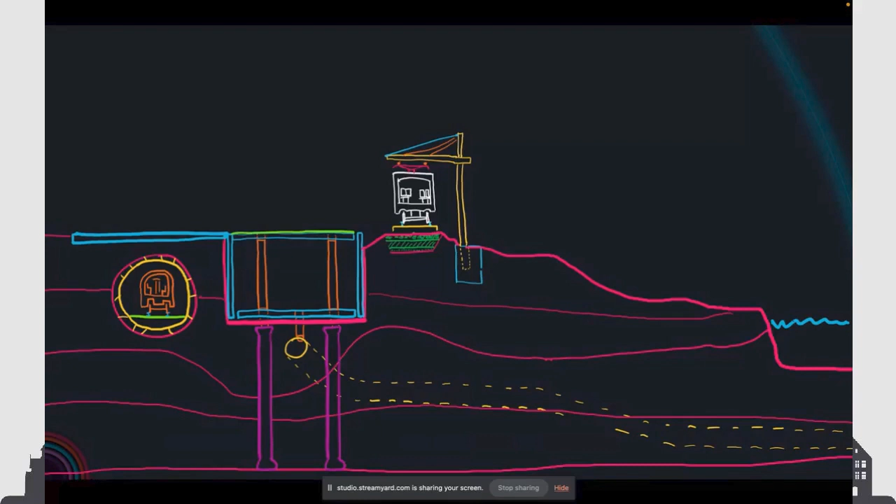And so that's the second thing. And this is where you get this, and some people like to call these digital threads or something like that. How can we relate all this data together without having to convert to a huge master format? So I'll just play through these slides quickly. But what you end up with is, okay, we have IFC today. We could break it into individual pieces, but those individual pieces aren't enough because we need different representations that buildingSMART doesn't necessarily provide.

I'll skip through these. Sorry, tend to do animations. When looking at them, they're not nearly as complex.

So the approach you could think about is to say, okay, IFC is going to be the solution to all these things. Good, Jeff? Okay. IFC is going to be the solution to all these things. But at the end of the day, ownership of this entire concept of a distributed built environment has to be much more diverse, and it can't be one standard to rule them all. So we end up with a need to make a bridge between what we have in IFC today and what we have in these other formats.

And I'm just listing some that have come up. There's hundreds more that aren't described in the Rail world. There's others that aren't represented here. The point is we should plan for anything to be related to a future version of IFC and make that simple, not something IFC and buildingSMART has to necessarily design for. So questions so far? This is just background information, I suppose.

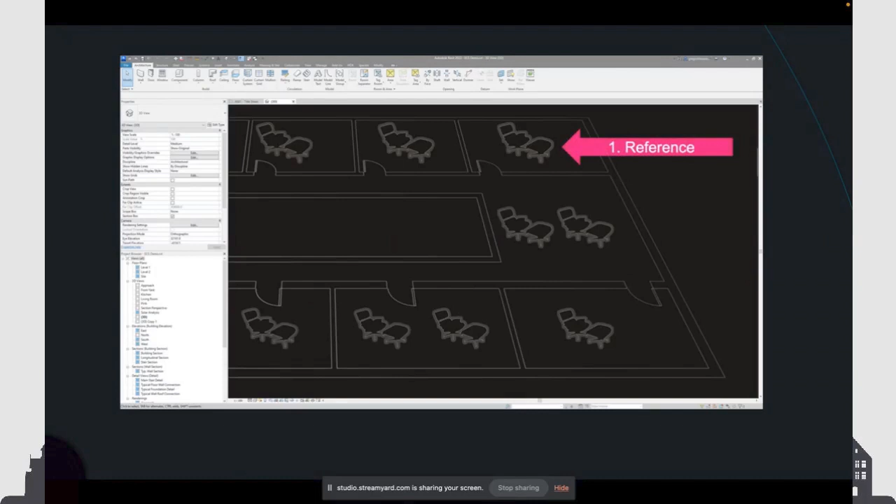And I skipped over this, but it's an important thing that we've been talking about in our community for a long time, is a notion of how this can enable design transfer. And so the key thing here is by breaking these data pieces into chunks and pushing towards a reference workflow, we actually fully support not transforming data, but just having the data that existed prior to being moved into an application actually existing after it moved out of an application. So you can do something which is like design transfer, but you don't have to have perfect interoperability on geometry.

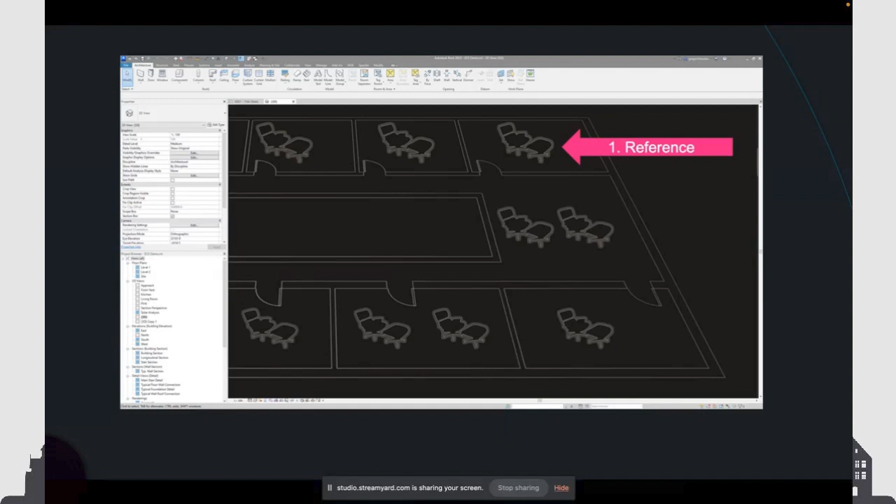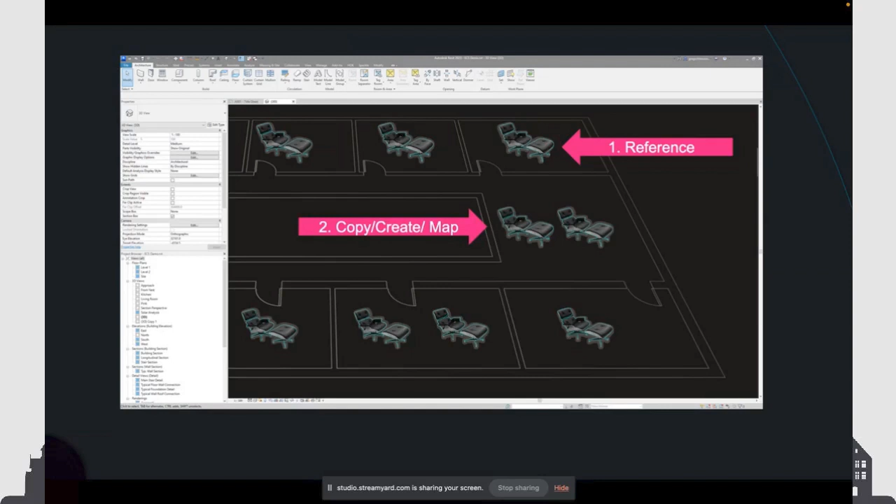So the point is, if we take application one, publish some components, reference those components into the second application, I can copy, create, or map, as in make some new data inside of the existing application. Leif Granholm has always pointed out that Tekla, when it references an IFC, actually brings in an IFC, and then the second you want to make a change, it duplicates it, and now you're editing a detached or referenced copy, but it is a copy. You're not editing the native data.

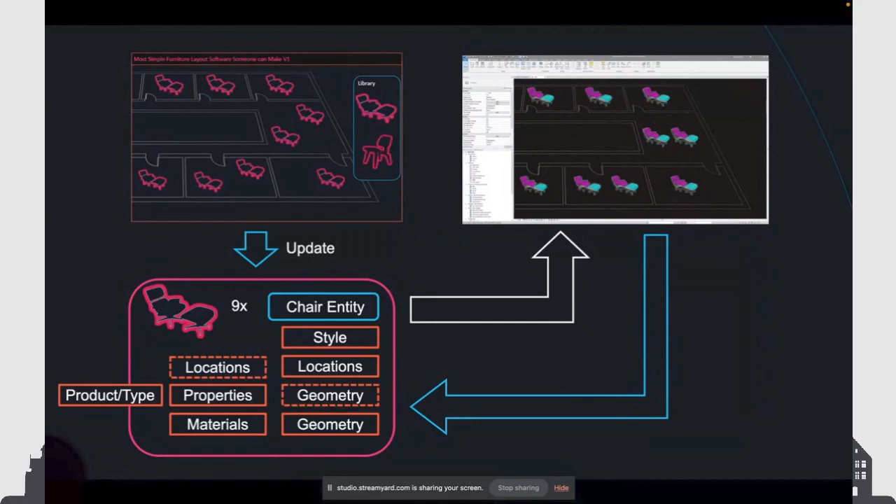So by embracing this fact, you can add the new information, and because the combination of these things can happen external to the application, you get to choose which one of those you would collect up and move forward. So I'm not destroying data if I move it through an application, because I still have it. I'm just adding to it and versioning that data as you add more applications to the chain. So this plays forward logically to say, if I have a contractual relationship, there's a procurement step, I can share a couple of pieces of information. The company on the other side of this relationship can add new data.

And the point is, the white boxes came from the left side, but the right side can add new data. And then if this were to be updated or iterated on, sorry, I forgot I took that slide out, like if locations changed on the left, they could be updated on the right via a new version. And basically any of the data that was added out of sequence, so you can think about this as sort of breaking linear data requirements. They can be updated after the fact. And this could be version 2 on locations that came from the design team, but the data that was added on the right side is just fine.

Again, now this is an excellent example why I asked about GUIDs. So let's say I'm an architect designing in Revit, and it creates a GUID. Okay, and until this element is destroyed, it will remain. But let's say I somehow, by mistake, deleted those elements and added the same chair again. The guy on the right-hand side lost the connection. So the cost, procurement, and so on, connection to that chair is completely lost.

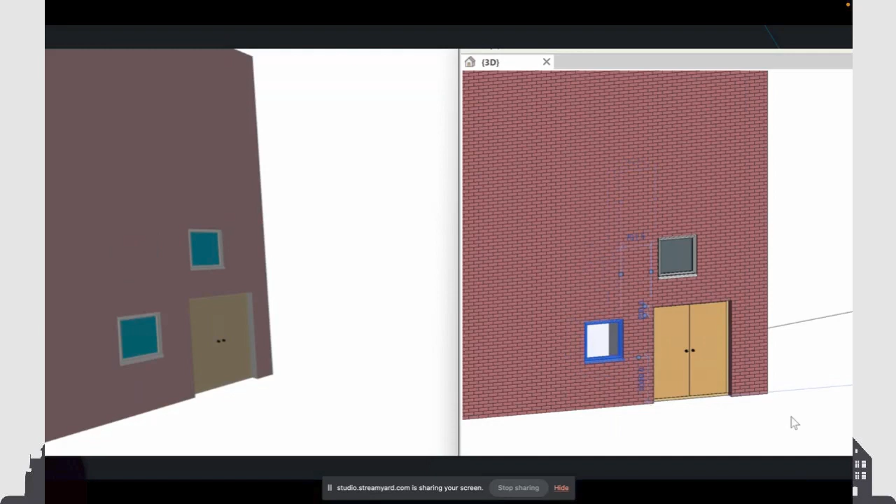From a game development perspective, this looks a lot like asset pipeline production. I'm showing you an example because examples, we're making these changes to facilitate them. This is just a dumb, simple one. Yeah, this does make tooling much simpler to imagine. The next actual slide I had is Tom Van Dieg, the CTO of BIMcollab, doing an example of what you're just describing. So this is a server-based entity component system that's inspired by the work we're doing.

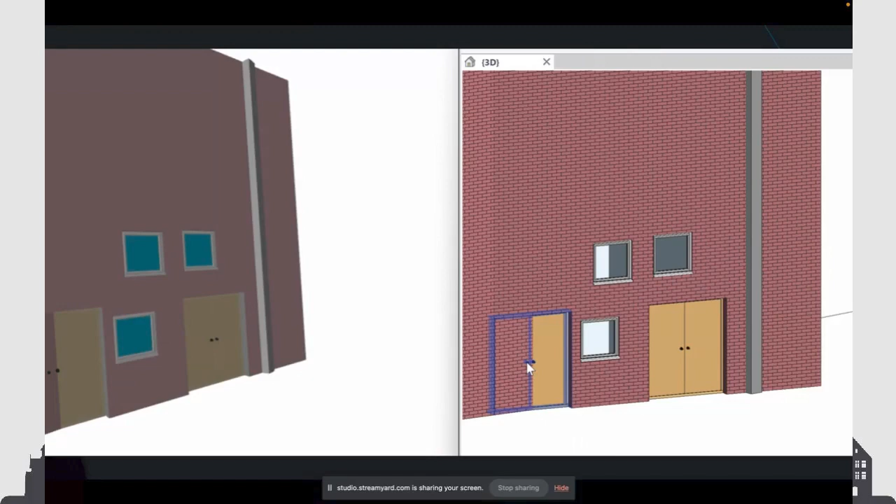This is a prototype he's working on. So this is live transactions. So again, we're not going to be in the tool building industry, but we need to support slow, laborious, you're going to get updates in 6 months, or we have a way to, once you have a connection on either side of this component and its location and you can mutate it, then that's an example.

So this is really just using the exact same thing. So actually, I think I brought it in here. So these are the 4 components he's described based on what we have in IFC today, but he's simplified them to do this demo. But yeah, I think we can all imagine how you could make tooling and pipelines and all kinds of things make this

very slow file-based transactions where I have to do approvals. You could break this into much more robust pipeline sort of things. It's in the thinking of how the data should be described, but not the tooling we make within buildingSMART.

Yeah. But the data structure you are showing us will probably improve the project performance, but a lot of data is already existing from objects and components. How do you get this into your new structure? So the 2 paths we're going to get started on, this is sort of the kickoff to this effort, is to take existing IFC data.

Actually, Thomas asked, we're going to be in the meeting tomorrow, because is forward-based compatibility the right choice? Backward is harder than forward, but forward is certainly planned for. And the components, the relationships are a real key part of that.

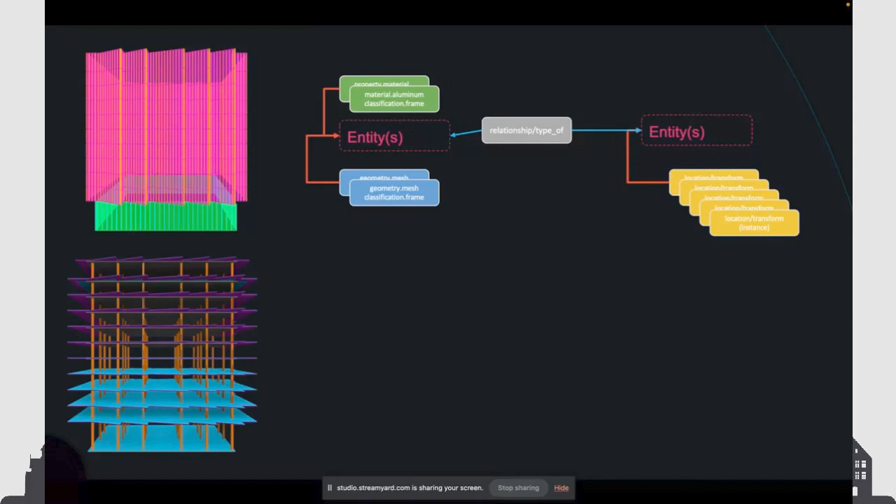The locations are all individual, but everything else can be standardized on a type. If you look at this bottom one, meant to be the superstructure, we still have green as material columns, concrete, and then the geometry at the bottom. But in this one we have the same kind of thing, with more components on the unique instances, because this geometry tends to be more unique.

I'm not saying this is the right way to do it, but it points to the flexibility of this approach—the components can be on either side of this, and with a relationship you say where you get the definition from. Does that make sense? So we play this forward.

I said this was in the context of a carbon demo. Without modifying the existing data, you can make new material entities that hold aluminum, concrete, and the bottom two components are their carbon information. So this is doable today.

Really one of the most important parts of a system like this is it allows out of order operation, which is a very important concept of adopting a system like this. We showed a little bit of that: if I share a little data about the furniture with the contractor, they can add data and I can come back and make updates.

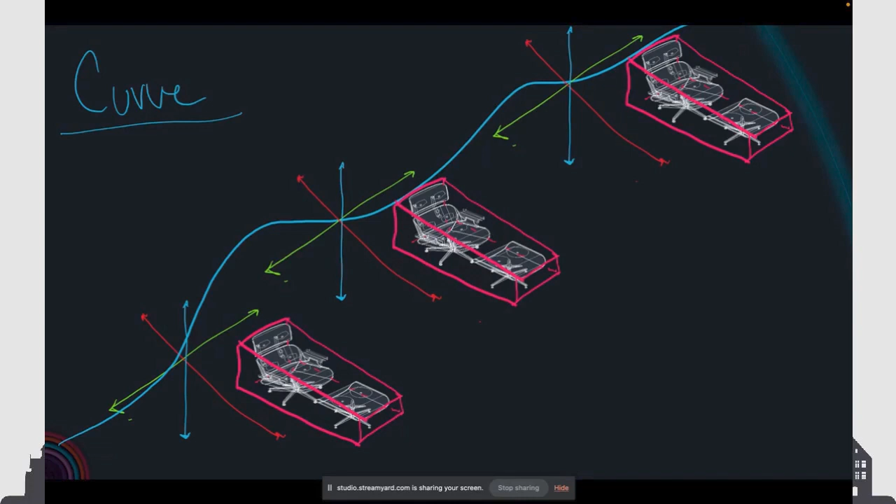From a game development perspective, we now have a lot of ways of making our games and describing things, like USD, Universal Scene Description. How do you think about different industries mixing together in this format? Because we have different ways of describing things and different ways of looking at things. I mean, from a game development perspective - by the way, I'm from the building industry myself, but in my spare time I like game development. I would think for a car you're giving entities or functions, and when I look at this presentation I have two different worlds I have to combine. So how do you format it so they talk to each other?

Well, there are two ways to look into the problem, and I think the system intentionally tries to solve it both ways. One is they don't have to intersect - the system allows them to never see each other intentionally. It's less ideal, but it's a way of solving this problem. But the other is we do the inverse and say actually this is the right way to make relationships between our data, and we coordinate them. Tomorrow afternoon we're doing an OGC session where we're going to prototype some of this in the future. We haven't picked what OGC standard we're going to talk about because it's sort of a voluminous GIS BIM conversation, but clearly we need to pick some representation on that side and then the one on the buildingSMART side and put them together. But that's going to have to be a collaboration.

The key thing is, though, just like you can have your own private components, people could have components in other systems that buildingSMART never knows about. And things becoming clear. That's good. There's a lot of slides.

Okay. Yes, I mean, these components, I think in theory, it enables you actually to include more richness about the data representing across different sectors. But yeah, you can have the richness of a multi-sector representation. Exactly. So I'm thinking, because putting that into the picture, the scenario becomes more dynamic. So I'm thinking these components seem to be more transient. So when you do one scenario, you pull data sets by using that UID, unique ID, from different resources, do the function, analyze it, release it, and then you keep the data privacy from the different companies.

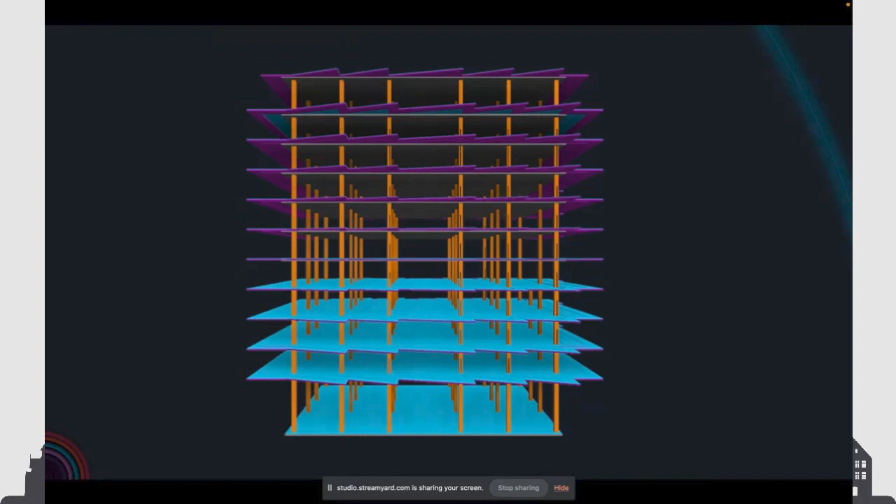Okay, so next is, we think we should embrace a more simplified representation for a mesh representation. So basically, go back here. What we're proposing is that a glTF representation is a first-class citizen here. Yeah, this is so easy. It gives us what it looks like much better than we have today, but we're certainly not getting rid of simpler triangulated methods. There's a discussion to be had: glTF is binary, but the triangulated face set is useful. So, but we should look at others as well.

We are certainly pointing to IFC as more than a STEP and EXPRESS representation of geometry. It's a semantic way of describing the built world. That doesn't mean we have to be limited to a singular geometric representation. This is a nice, easy win for people that want to coordinate and look at their building at the same time, or look at their infrastructure at the same time and know what material it is, these sort of things.

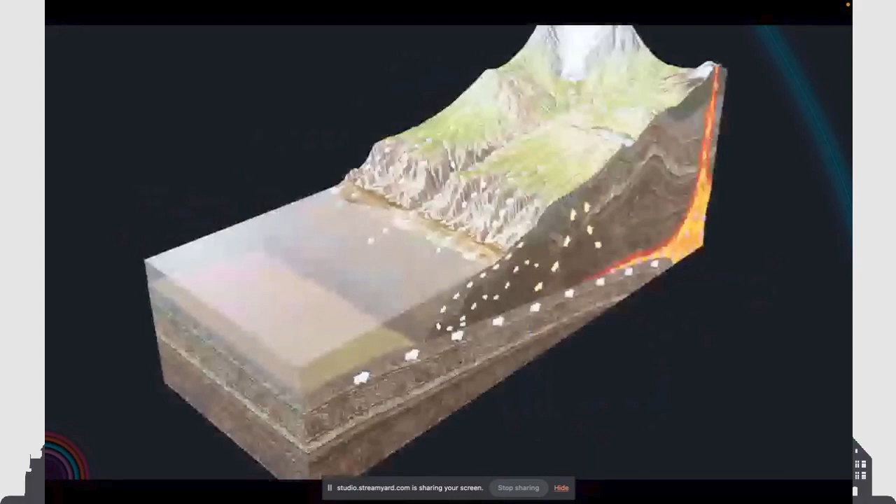Everybody nods. That's simple. And you can do dumb animations in PowerPoint with GLTFs. Let me sort of jump around. I picked that point because, okay, so let me go back in time.

So groupings, I'm using this term generically because if anybody's tried to figure out groupings, any sort of collection of stuff, each comes with a different kind of relationship. I did this, well, now it's almost a year ago. Anybody raise their hand if they're 100% certain what type means in IFC? What information is typical? Properties, I think I'm right in saying that. Not geometry. Certainly, that is the one I'm clear about.

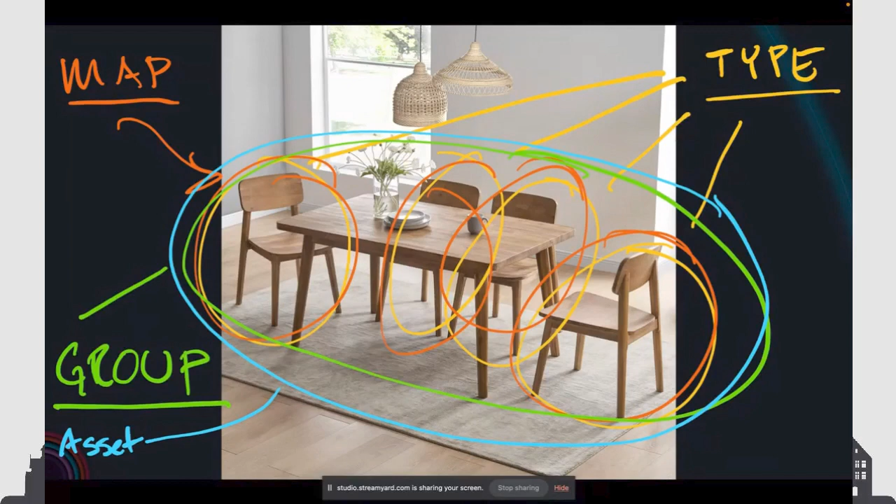I won't try to do this because I'm quickly going to get over my skis. Map. This is actually for geometry. So now we have 2. Now we have 3 because I want to put them together. I can't remember what asset does, but it's a separate kind of group used for interior projects, I think. Then we have inventory, which doesn't have a placement. Then we have element assembly. This one actually allows grouped elements to be placed, but only structural elements.

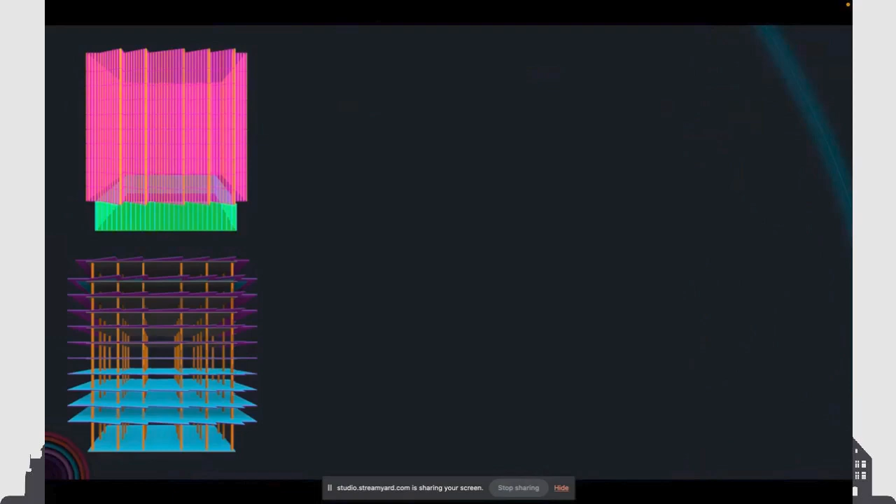What if I want to add a chair here? All of these are inconsistent and very hard to use. If I wanted to make this collection of things something I place that comes with a chair that isn't part of, you get the idea. So the proposal, oh yeah, forgot about this. And then if you want to put it all in a line, it has to be an infrastructure. So really this builds itself out. You saw this before.

Group of. This is the sort of logic. You can group multiple components. I'm showing these full entity things. You can obviously do component to component groups, like these pieces of geometry components are part of this analysis group.

Thomas. Yeah. Sorry to interrupt, but I have to correct you. I think the group of is a unique concept, but what you group it to has all this multiple justification you're pointing to. I see your point. Groups by. Yeah. Thomas, you've seen my presentations enough to know that the words I use sometimes are not the ones you should key on, or the spellings and so forth. The other one is, oh, sorry.

Just one thing. Why this concept of groups, which is excellent? No, I don't. You can use a relationship to bridge property sets across objects. Why is it not a natural behavior that we can dynamically change property sets for certain purposes? You mean basically hard coded. In the rest, we have huge flexibility. Here, we have something very hard coded.

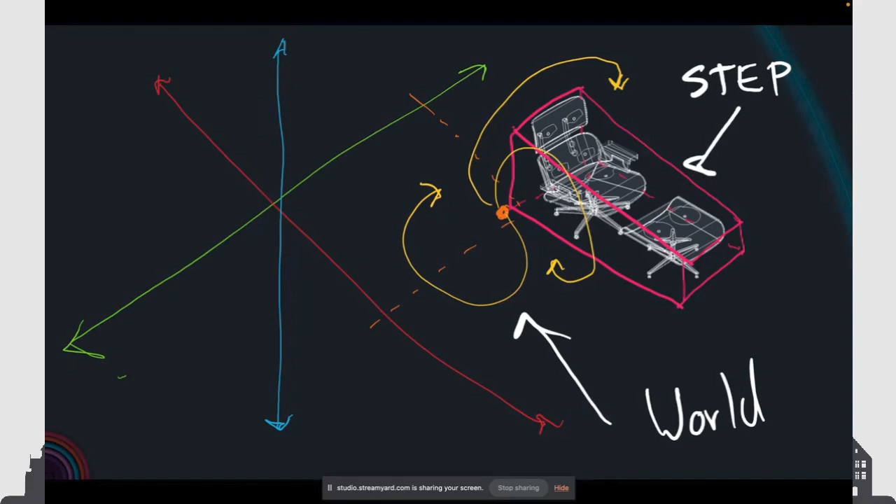So we only got a couple more. Yep. So, yeah. I just point out all kinds of other examples we could have on placements. That is it.

Quickly, what's your gut about compatibility with bSDD and IDS? Have you thought about it? Do you think these are applicable constructs for this? I think they are. Sorry, we got to go way back. On the bSDD side, if you think about it, what's exposed in bSDD now is property sets as endpoints, not the properties themselves as endpoints. Correct. Yeah, not the instance data. Yes, the definitions. So certainly we would need to mature this.

One of the things we'll talk about tomorrow is we're going to rip apart that simple building structure, map this, and show the actual example schemas we're developing. We need a more robust component definition approach, which is why we're pointing to JSON-LD, because it has this XSD XPath stuff so we can be very specific on the definition side of things. This is, I think, where we're going to point to.